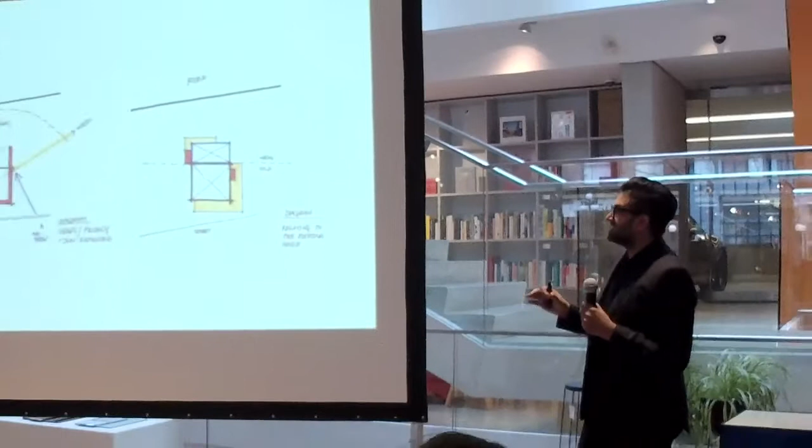So the idea with this project was to really just take the information, and really it was going to be a diagram of how the architecture worked - nothing more, nothing less. And so it started with these diagrams.

It was about looking out back to the backyard towards the river, an untapped view that hadn't been used. It was about taking advantage of the solar exposure, sun in the house that wasn't there before. And then most importantly, it was about modesty - using a modest material palette, but also thinking about it almost like horse blinders, so the front of the house maintained its real traditional quality, but on the back there was a lot more glass and certainly a modern aesthetic. And so it really started like that.

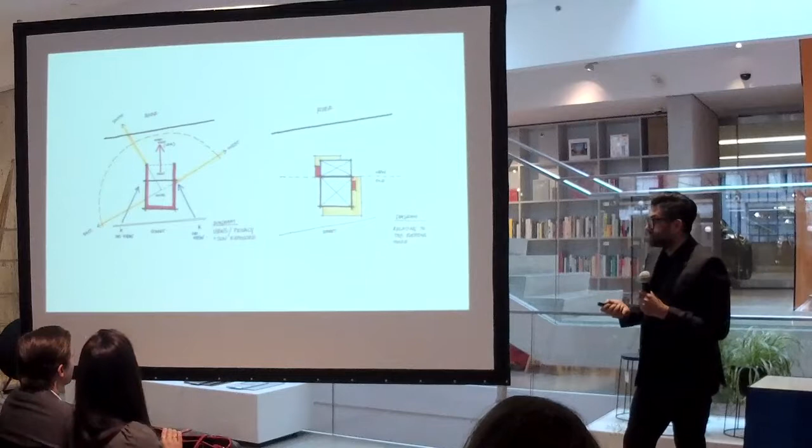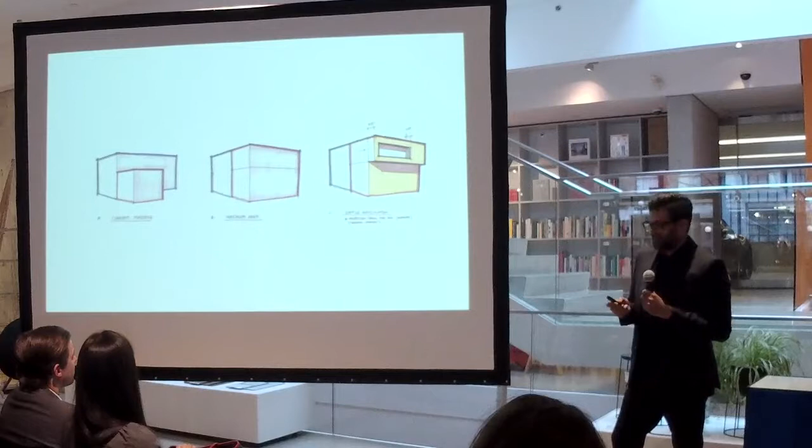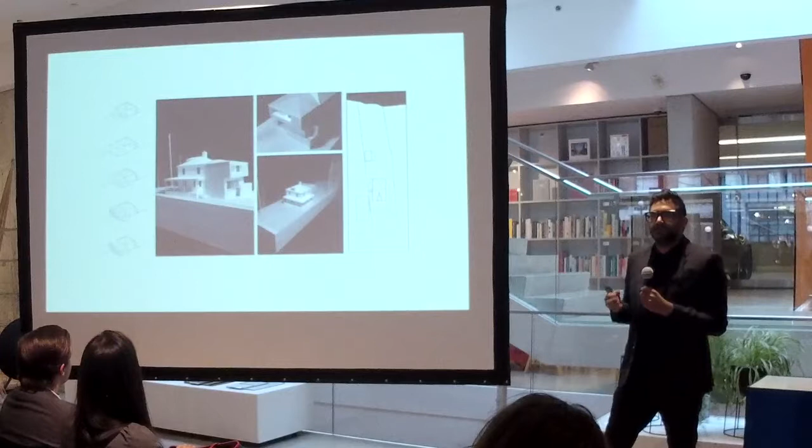And so that was also the beginning of this ethic of design, thinking about things in 3D, not just in diagrams and sketches, going straight to three-dimensional computer models. Even when it was just me and not an us in the studio, it was about making these models, playing with little pieces of wood, being able to walk around it and see what it's going to feel like and how it's going to work when playing with solar diagrams.

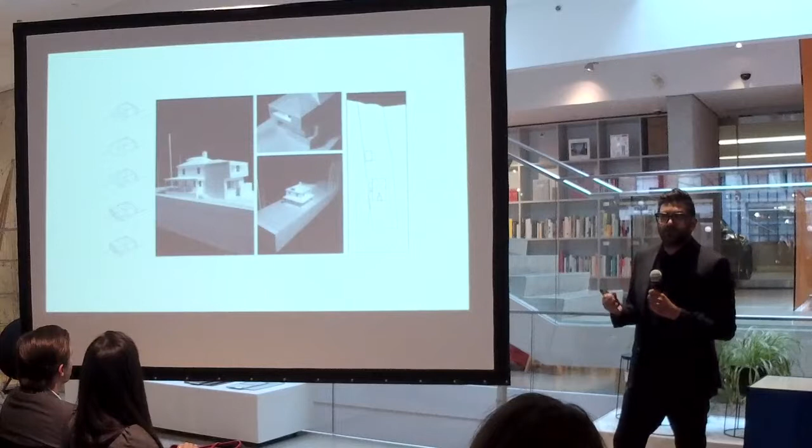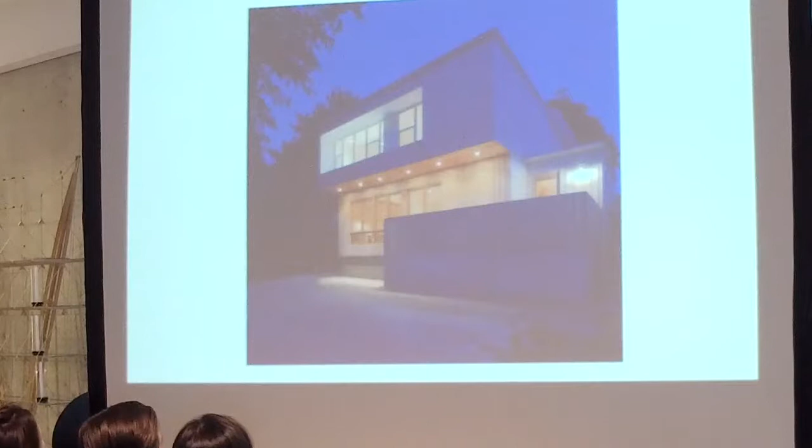And so this is almost this kind of chameleon type building, where the front very much maintains its very local and familiar palette of eastern white cedar shingles. And then on the back, hence the name cedar and three textures, playing with vertical stripes of the same cladding. On the back, it's really this modern kind of intervention that looks out towards the water.

Now, probably the most important part about this project, beyond it being the first one, was the builder. We interviewed three people for this project, and the first two were very well-known guys in town who had built forever and were very comfortable with modern as well. But the third came in and absolutely knocked our socks off - it was a no-brainer. This person would end up becoming really a mentor to me, and happens to be a woman builder, Deborah Herman-Spartanelli, who was one of the first mentors I had with my own practice.

Now, when I'm talking about my work, it's hard for me to not talk about the first three because they really go together as a set. Not just because I was in the attic at that point by myself figuring out what I was doing, but also it was really trying to figure out what that process of design was going to be as I moved forward.

What's interesting about this project was it really only came about because of that wonderful person, Deborah, who met with some clients not far along, maybe about 15, 20 minutes down the coast, who came to her and said, we have this cottage and we want to think about renovating it. Do you know anyone who's a designer around who could help with this? And she said, well, I'm working with this young guy. I was young then.

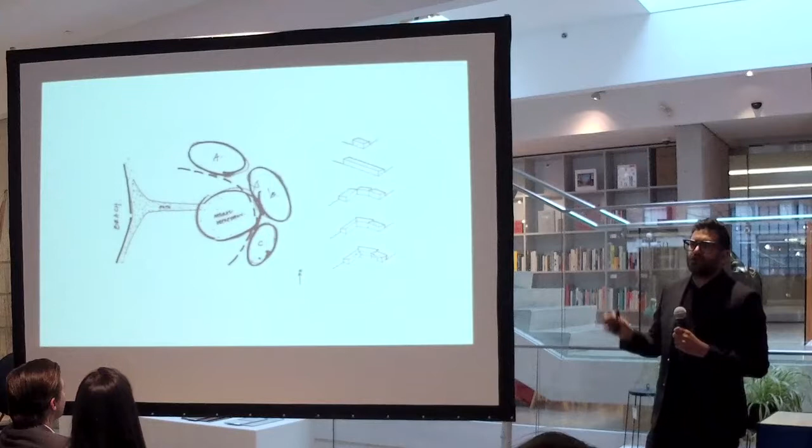I said, well, what if, like mother's arms, or grandmother's arms in this case, wrapped around this bowl? So no matter where you are in the building, you're actually just looking inward to where everyone is playing and congregating. From that idea came the idea of a program wrapping around this bowl: a guest wing, the main gathering area with the kitchen and living room, and then the ensuite area with their own quarters, with the ability to shut it down depending on who was around.

That translated really quickly into playing with materials. These ideas are flat, and you're playing with diagrams at that point. You feel almost this itch to get some card. Maybe it's the generation—I went to school where we were still making physical models. It's like we need to see what this looks like and test it out.

So just with card, starting to play with the idea of that very traditional shed building that you see all over the coastline of Nova Scotia and parts of our country. It's like, well, what if it was this contorted form that really wrapped around?

Those models end up becoming a lot more complex and starting to think about structure. Starting to think about how that thing actually plays out in scale, and becoming more detailed, thinking about light from above and how you control solar gain.

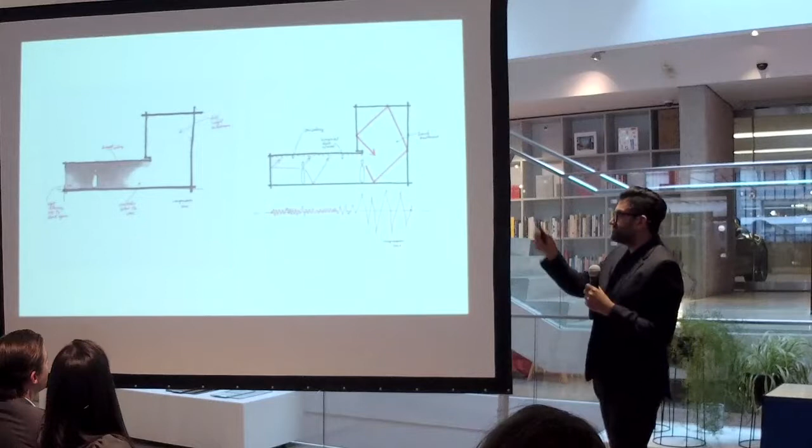Playing with ideas like this that probably felt very lofty at the time, but ideas like Frank Lloyd Wright would have done about compression and pushing the space down at the entry, so that when you walk around that corner, not just with the light but with the way we handle the sound, it just felt like you opened up towards this unbelievable view that is entirely what Nova Scotia is known for. Every time you re-entered that space, it felt just as special.

Even 9, 10 years later, there is nothing more exciting and kind of crazy than the thought of making really horrible card models and then starting to actually build it. It's sort of a thing that's hard to believe.

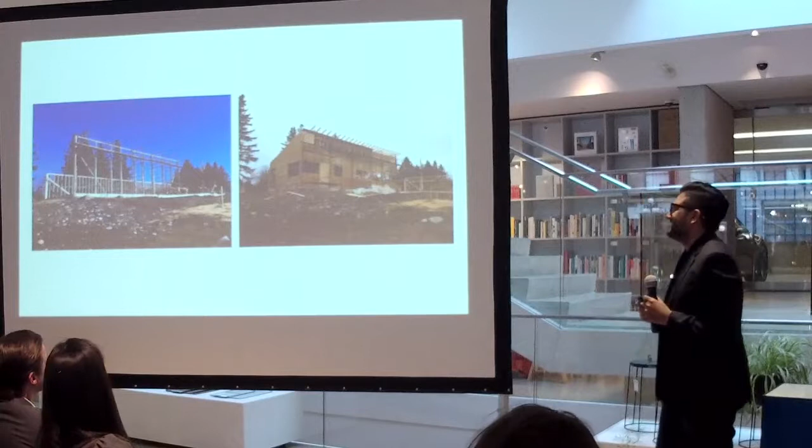There's a photo that I can't find, but I remember when I worked at Young and Wright on one of those McMansion-y kind of cottages, there's a photo of me standing in a foundation. The smile on my face—part smile, part terrified in case I messed it up—but I drew that foundation and someone actually built it, which seems insane, right? That sort of thrill of seeing those big ideas come together.

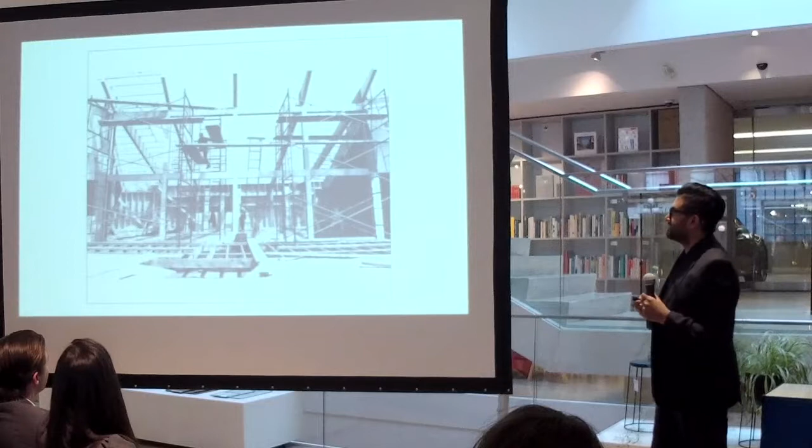Ideas of light and contrast and feeling alone, but also feeling together with everyone. Ideas of texture and materiality. And then finally seeing it all come together. Even if you're there every week and only a little is done at a time, there's nothing more awe-inspiring than seeing that come together.

So this is on the entry side, where as you approach it after your long drive—your hour-and-a-half drive from Halifax to the cottage, which is primarily tree-lined—you don't actually get a lot of view of the ocean in that last half hour. The idea there is the scale of this side of the building is really low, and as you enter and turn that corner and see that view, you're not just seeing it for the first time on your property, it's actually the first time you've seen it in your whole journey there.

People always ask about this solution with the stone lining in the fireplace. That's there for code, but now when you go back, that cedar has grayed out and it's really become a completely monolithic palette.

This project ended up getting us some really nice attention—not just the project, but my collaboration with Deborah and the engineer we worked with, Andrea Doncaster, who I use all the time. You can imagine a trio like that being slightly unorthodox in a fairly masculine field. That project had an article that came out in the Globe and Mail.

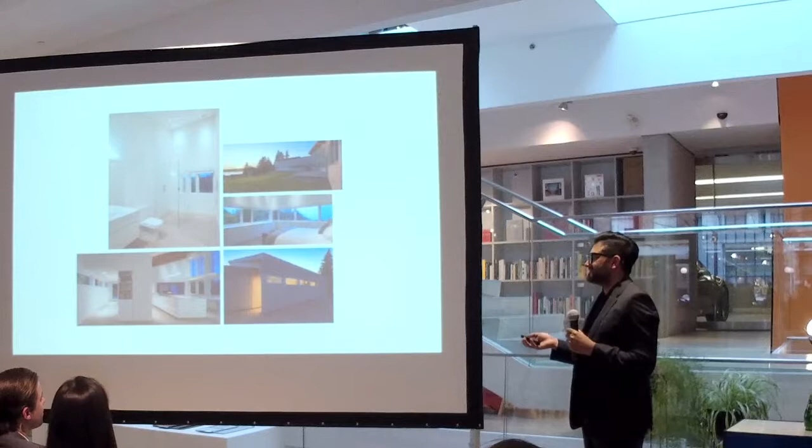After reading that article, it ended up being too far for Deborah to build, so I took it on. This was a couple nearing retirement who had previously been living in a basement apartment in Halifax. They were artists before they had children, ended up getting standard jobs to pay the bills, and really lost track of their passion for the arts. So they bought this property in the forest, about 45 minutes from Halifax. This was going to be it - they were going to be alone in this wooded landscape where they could finally make the things they'd wished they'd been making for the last 20 years.

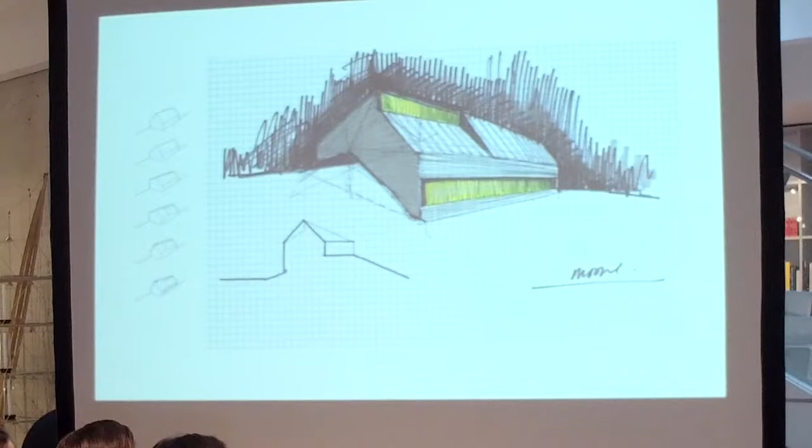That ended up becoming this sketch, which was really about this thing climbing up the hill with long, uninterrupted views of the woods. There's one thing about wanting to feel alone in the woods in this scenario - you feel really alone when you can see all of the nothingness around you.

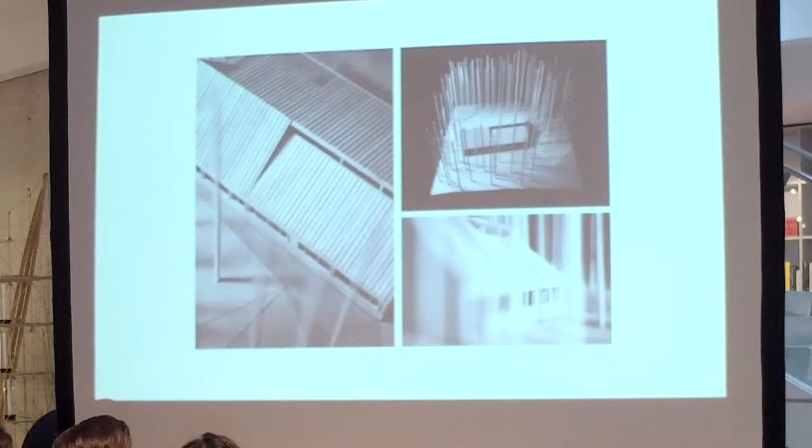It's different than just being enclosed somewhere, but to actually see the nothingness. So again, playing with those models, starting to think about materiality and those gentle moves that allow for light and the specific program they were going to use.

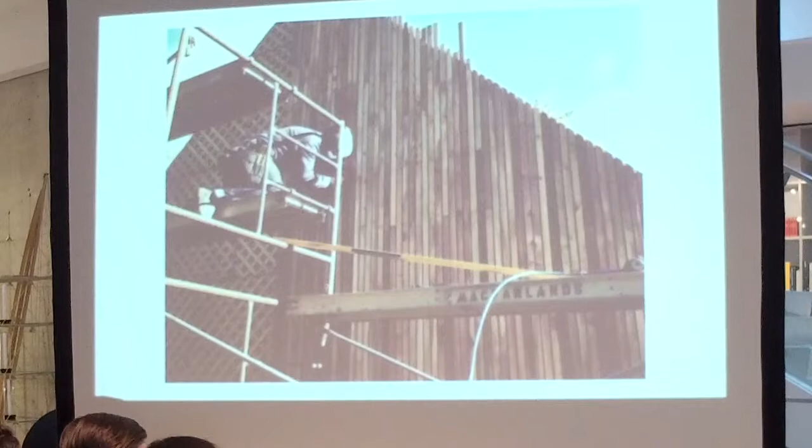This project was really a labor of love, not just for me, but for a lot of people. Like I said, they had previously been living in a basement apartment. There wasn't a big budget, but there was really a will to do something special. As we were interviewing builders for this project, this young guy comes up to me - he had just started his construction company, had tattoos all over his body, and was like, 'Look, I want to build your project.'

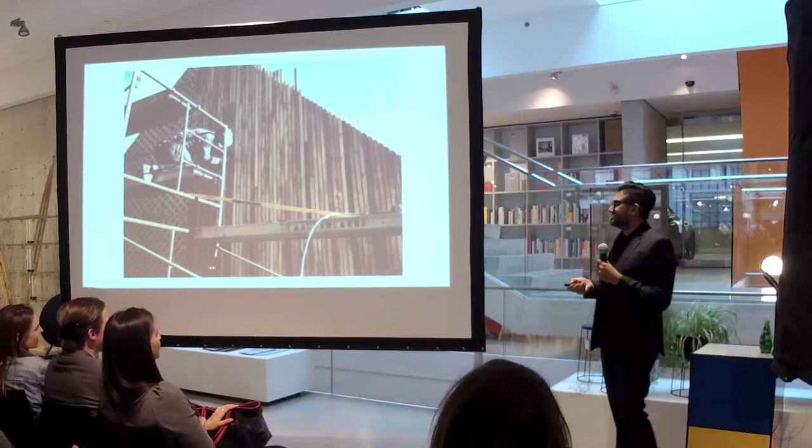I was like, 'That's very aggressive, to just come to someone's house and say that.' But we ended up going with it, and I was intimidated. It was really about this sweat, people just working to prove themselves, just as I was doing in that stage of my career as well. So ideas of isolation and being alone, but also being together where it's needed, not being afraid to be high contrast or dramatic.

You can achieve a lot just by really thinking about it and looking around you. This steel gate, the screen, was just in the steel trash bin at the place I think it's called Metals R Us, believe it or not. It was at the back, under a pile, and we were like, 'what can we have that for? That's going to be the screen.'

These hanging lights are probably not the kind you'd see in this store - they were literally a hanging bulb from Canadian Tire that we jimmied together to make this. Then these louvers made of hemlock just cantilevering out - really just playing with texture and the material of very, very basic materials.

And in the end, it looks exactly like the model. So there really isn't that point where the sketch and the model start to lose those ideas - it's about carrying it right till you complete it.

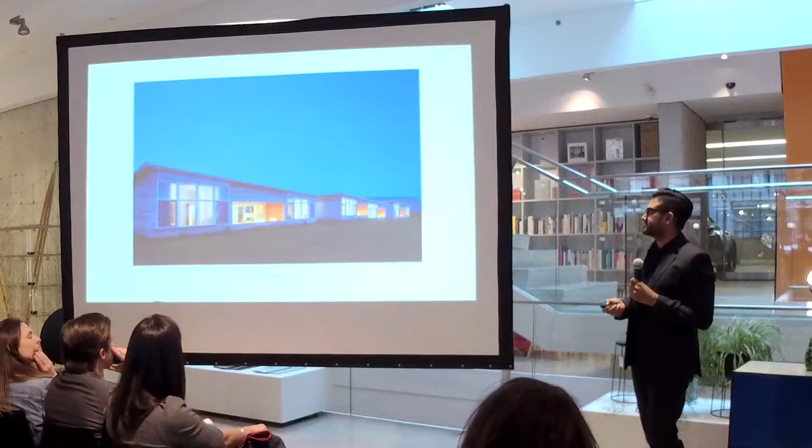We started taking that strategy, that formula we'd produced, and playing with very familiar forms and very familiar materials, trying to do something special with it in a quiet way. Then in 2014, I was able to move just down the hall into a slightly bigger space, with a few projects under our belt, and was able to hire a couple more people. We continue, and we start experimenting with different things at this point.

So we're playing with retail. We're starting to play with different kinds of residential.

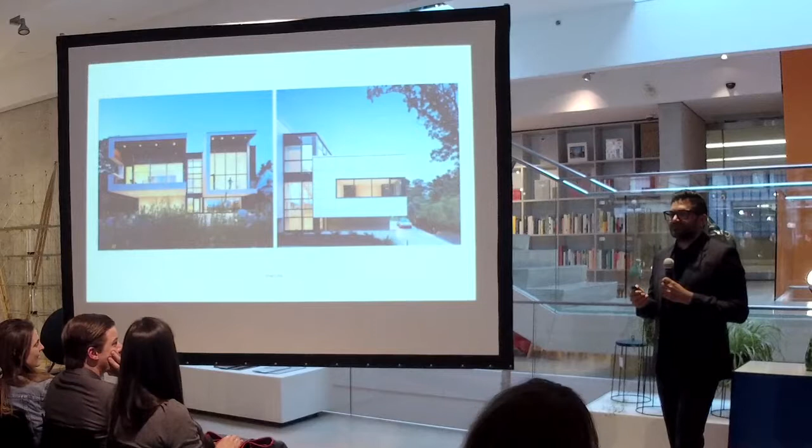I should stop and say that the reason I'm here today is because of Ema Peter, who is your local superstar. She's, as you know, one of the best photographers in the world, if not the best. We've had the opportunity to bring her out for three or four projects now, and it's made all the difference in our studio to work with the best people.

Then in 2016, I just felt like it was time. It was a different thing — now I was going back to Toronto, having left as a student, someone like 7th on the list of a huge project working on ceilings, and then coming back having already built a little portfolio for myself. We now have 5 people working there, and a different kind of work that we work on.

I'm going to flip through a couple of projects here, but I'd like to talk a little bit more in depth about a few.

And these were all shot by Ema. So I'll go into this one, and there's a few I'll talk about. Sluice Point, which really is on the southern tip almost of Nova Scotia. It's unique in that it's an Acadian area, and like a lot of the places where the Acadians were banished to, they certainly weren't good for farming, and really just weren't ideal plots of land at all. They were like, you go there. But they made do.

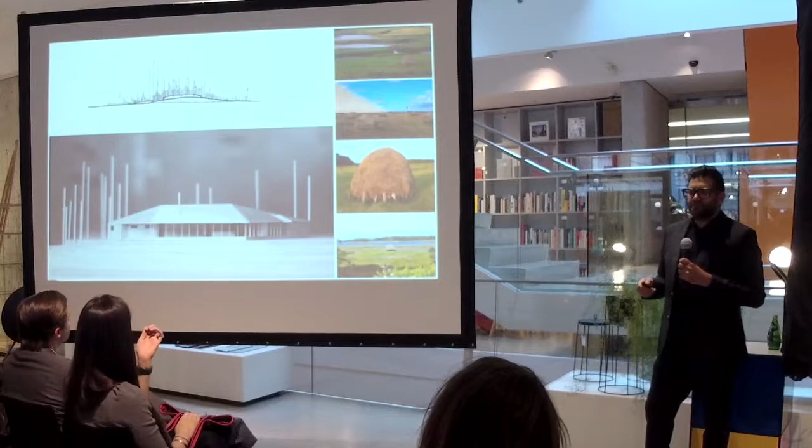The idea here was for a Swiss client who came to us, but didn't just bring us the project outright. We ended up competing for it - they gave us a stipend and gave another firm a stipend. It was just Jeff and I at the time, and we went absolutely bananas trying to win this first competition ever.

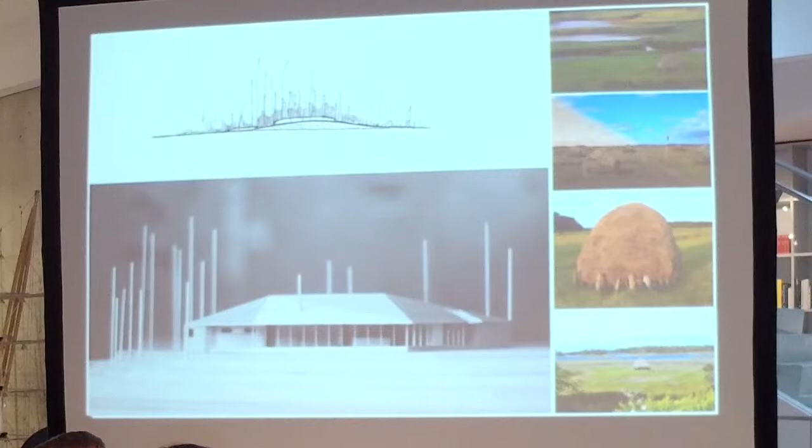We ended up winning the project, and it was really about this idea of a growth in the landscape - this low, long form that, if you squint your eyes, doesn't take away from this untouched rural area. It actually just makes it special.

So again, these card models, starting to play with diagrams of how you can take these regional forms and start to bend and pleat them to fit around this peninsula that shoots out. This was the first project here, which is this one.

This plan aims to almost condense your view - this tall, skinny view that, once you go inside, flips the orientation entirely. It becomes low and long and infinite.

This is the peninsula, and this is that first building here. There's a long drive before you actually get to it, and your view ends up being blocked. This idea of withholding is something we repeat a lot in our work to build this anticipated drama.

This was actually a drawing done by a student who worked with us. I knew he was an incredible artist, and I said, 'Carl, I don't know how long it's going to take you, but I think you have the opportunity here to do something absolutely special.' He basically sat for a month with cotton balls and graphite dust drawing these clouds. He's actually won numerous awards for this drawing.

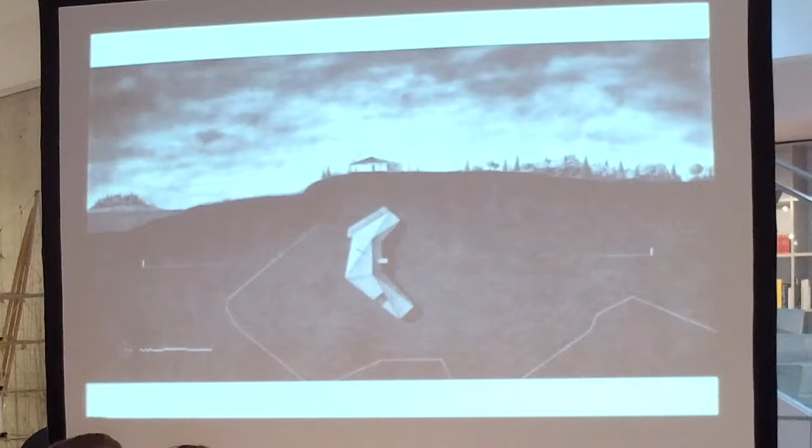It's those sort of things we try to do in our studio - things that don't make you money when you're trying to grow a business, but that's the joy of it. I always tell people, what's the difference between when you're in school and when you're running a practice? Ideally, there should be no difference. You should be working at it exactly the same way.

That roof form is actually really complex, but the budget wasn't very big - this is Nova Scotia, there are no big budgets. Even when a Swiss client is coming, the reason he's coming here is because you can build something with a very little budget.

So what we did was take that extremely complex roof form and build it entirely with prefab trusses. Every single truss itself is completely unique.

The reason we made this model - Andre is here, who worked with me, he built this - the reason we built it ourselves and put it together is you just can't trust people, and you can't necessarily trust the truss manufacturer that there isn't going to be some weird thing sticking up. So you put it together to make sure those lines down the hip actually work the way they're supposed to. We're psycho. Seeing this come together in that same form is the fun of our job, really.

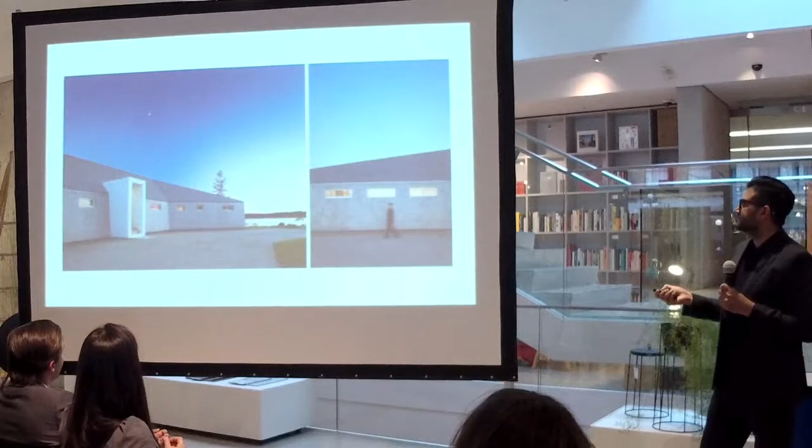And this thing really feels, again, when you squint your eyes, as if it's part of the landscape, the landform itself, but then at night it becomes this creature in the wild.

So I first went to this property back in 2012, 2013. McIsaac was the owner, and his family had basically owned it for, I think he said, around 300 years. As they first came over to the New World, their family ended up settling on this piece of land in Cape Breton, and so knew it very well. What made this property really special was that it wasn't actually good for farming, it wasn't good to raise animals. It was actually just a place for kids to play. He remembered as kids, that's where their grandfather would take them to learn how to snare rabbits.

This was a project for a New Jersey attorney who had basically owned this property for a couple of years, from Lawrence McIsaac, and decided he wanted to build these little pavilions. As you're trekking through this landscape that has a river and a little waterfall, and then you come to the edge and there's a massive cliff, not unlike the one I showed you. It's about storytelling, telling this narrative. So the first project was over here, the cabin.

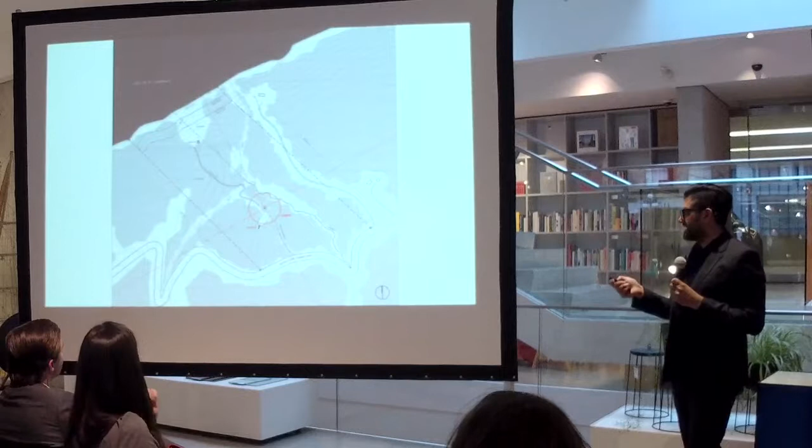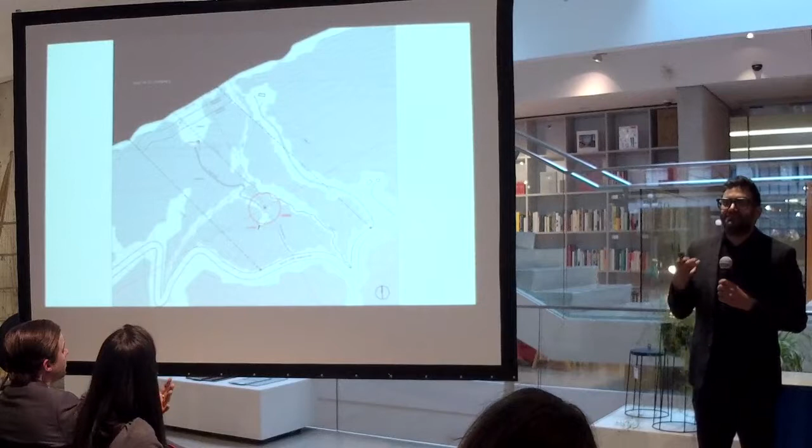The idea wasn't to actually have that coastal view on the edge, it was to look out towards where that building and that landscape would be. So you're looking through that valley out to the conclusion of the story. Thinking about height, thinking about regional form, taking that really steep gable this time and playing with it so that from every part of this cabin you have a different view of something special, whether you're looking out at the forest, back at the waterfall, or down that valley itself. As you're winding your way up, you're seeing something else that's different.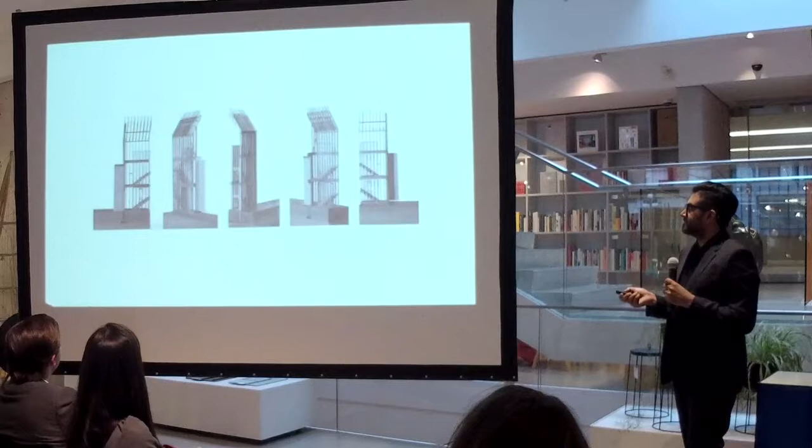Now, this is a really windy area, a place famous for wind. So one of the things here, with a low budget and using Andrea Doncaster as our engineer, was really thinking about bracing. How do you use just nominal lumber and hold-down clips to ensure that this thing stays in place? That ended up becoming a really interesting thing to model, to really test out how those ideas work.

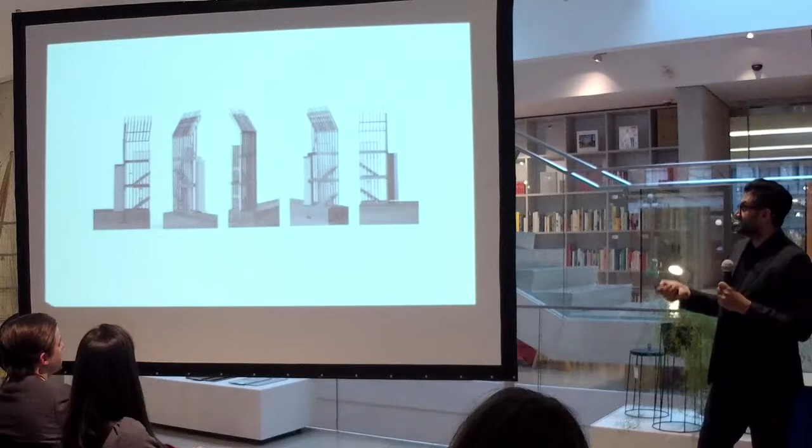So we took that idea, and I said to the client, what would be really cool—brace yourself for this—is if we did this with a 2-ton Corten steel hoop that was 24 feet high. And he was like, yes, let's do it. That really ended up becoming the icon of the project, this entry hoop that speaks to this tradition of the windbreak in this extreme climate.

Clad entirely in local cedar, with these strip windows up the back just to give you a little hint of life inside, almost as you're climbing the stairs.

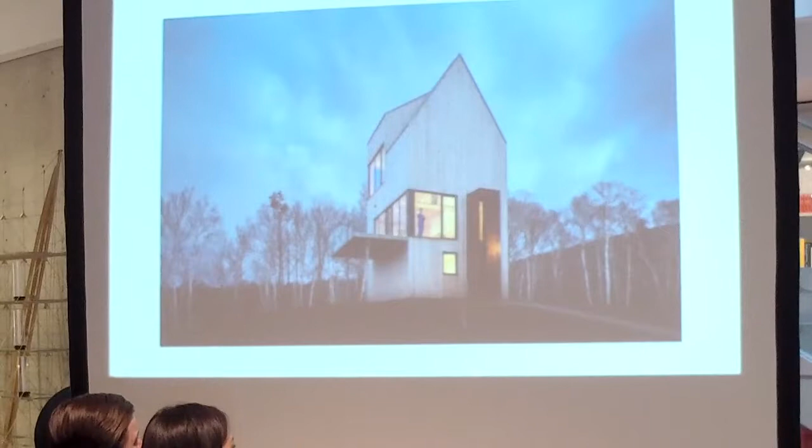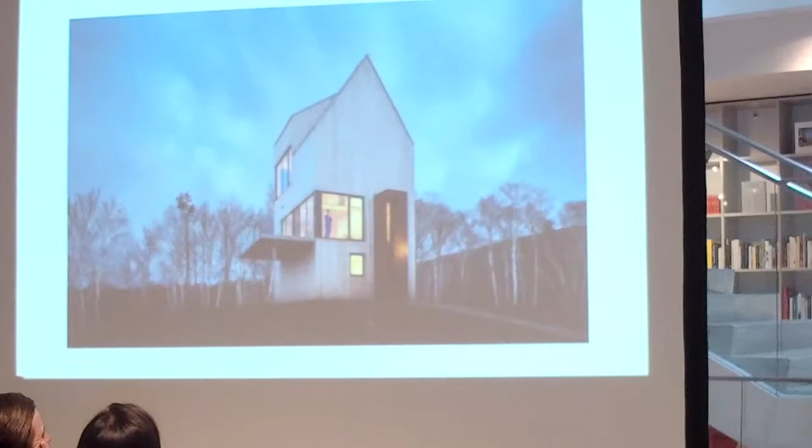I'll go back just for a sec. So this wonderful guy here, Andre Cott, used to work for me—he's way over there, hiding at the back. I remember asking him to model in this shoot, and I was like, I just need you to stand there, there's going to be a few different views, but you're going to be there. I remember him thinking, this is really cool, right, this is really great. But what I didn't tell him was that the reason we picked him is because he's not very tall. I picked him out of the studio, and I was like, this is going to make Rabbit Snare Gorge seem really tall. See, look how cool he is there, right? He doesn't know that—I would never have told him that beforehand.

So that was the first of a few projects on that site, again this idea of these creatures in the wild. I ended up teaching at Yale last semester and had the privilege of bringing my students to Cape Breton, where we took this property, and the project for the term was to design these creatures in the wild. It stemmed from looking at regional forms and materials, but starting to play with these interesting small buildings.

This was the second building that got built. It's actually for kayak storage and a wood shop, using steel frames and entirely cladding it out of wood. This happened around the time my son was 2 or 3 years old and really getting into transformers, so part of me was doing this to impress him. We made this building essentially like a transformer, with 4 doors on the sides that all fold up, and a huge gate out the front that peels down where you can drive an ATV out of it and slide your canoes out as well.

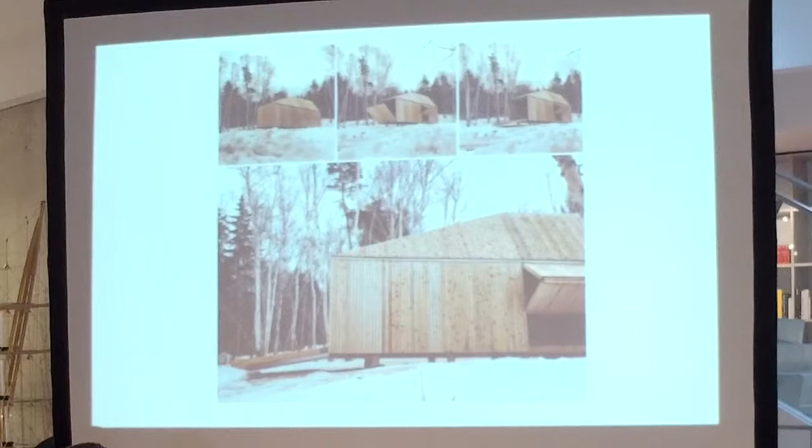The Lookout, not far from there. A lot of the projects we did are in the Inverness area and Cape Breton. This one was for Toronto clients who bought this really narrow piece of land. Even when they bought it, the locals thought these people are crazy, you can't build a house on it, it's so narrow and there's a huge cliff. It was really just thought of as the lookout, where people would stop over and take in the view looking back at the coastline.

So we went to them and said I think we could do something just by this back wall, really creating a linear bar building that looked out towards the water. But in this area, like the last project, the climate is very extreme. You have wind not just rolling in from the ocean, but actually from the hillside behind it. So really it was about coming up with a form.

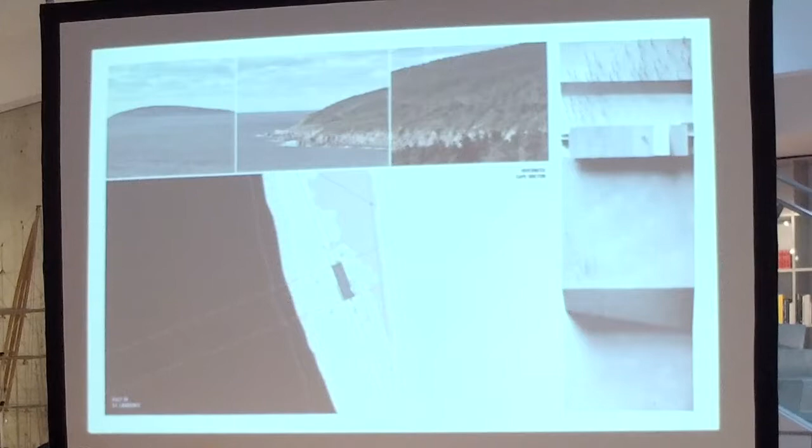So this is the coastline here, and this is the property with this very long building and a long shed roof that's manipulated in a very gentle way to allow for more light in the main gathering space. This idea of playing with these pods that slide in, and this back wall that has all the cabinetry and millwork in it, backed up against the bank behind it.

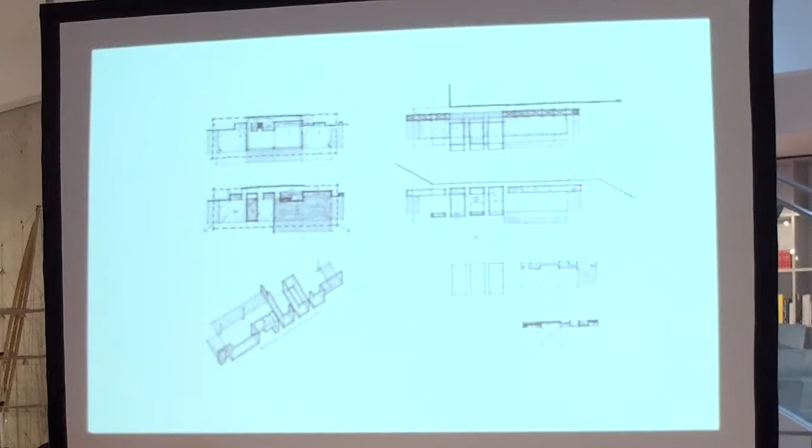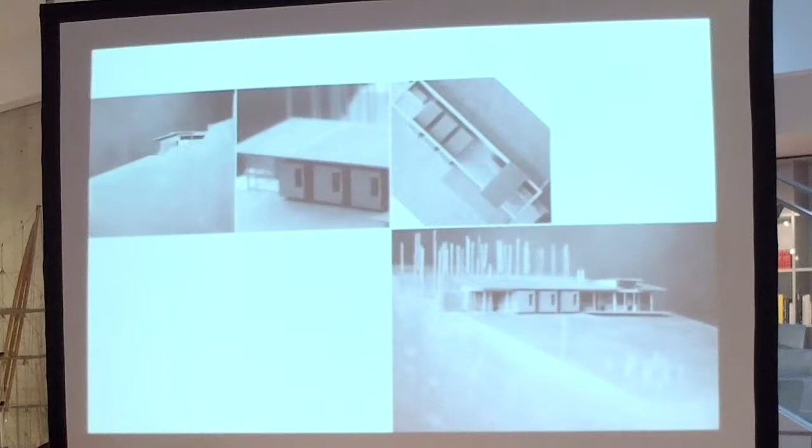And a roof form that really feels aggressive. Instead of the standard of the roof going up, looking out towards the view, this is almost bracing itself. It has its hood or its hat down low, so you can almost not see someone's eyes. It's cutting into the wind itself, very aggressive, with just one little eyebrow sticking up.

Andre wasn't around for this one.

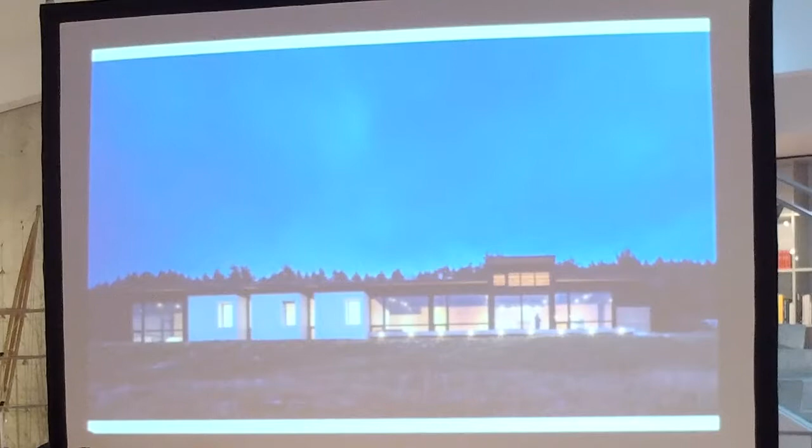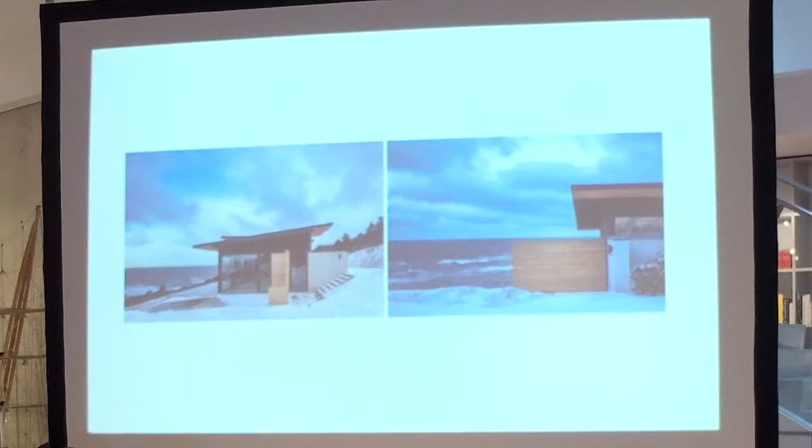You can see it's not gentle water, the wind is very intense. So the idea here was that it's really back braced, hunkered down and lying really low, trying to be aerodynamic.

And a final project I'll talk about, Float. This is actually just slightly outside of Halifax, and probably one of the reasons I love the city I live in is that only 10 minutes away from downtown, you're essentially in the wild, with untouched pieces of land available. That's why a lot of our clients, whether from Switzerland, the States, or other parts of Canada, come to us, because you really can't buy land that beautiful for that kind of price.

Not far out from the city, this is called the Purcell's Cove Backlands, a real glacial valley that has left these odd outcroppings, huge granite boulders strewn across the landscape, making the land useful for hiking and mountain biking. This wonderful client of ours bought this piece of land, and behind it was a huge boulder. The idea for us was to look out towards this view, but use that boulder to the best of our abilities, to really back up into it, so it almost feels like the building itself is part of that landscape.

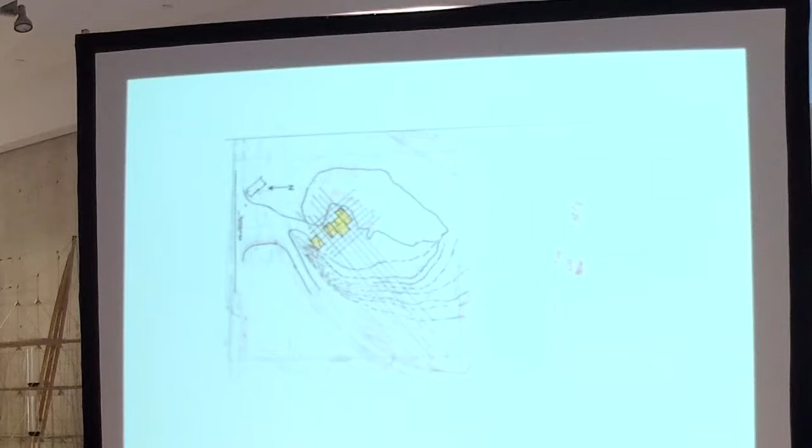So again, taking those regional forms, taking that standard shape, the shed building, and starting to play with it in three dimensions this time, not just opening it up, but actually tapering it out on the sides.

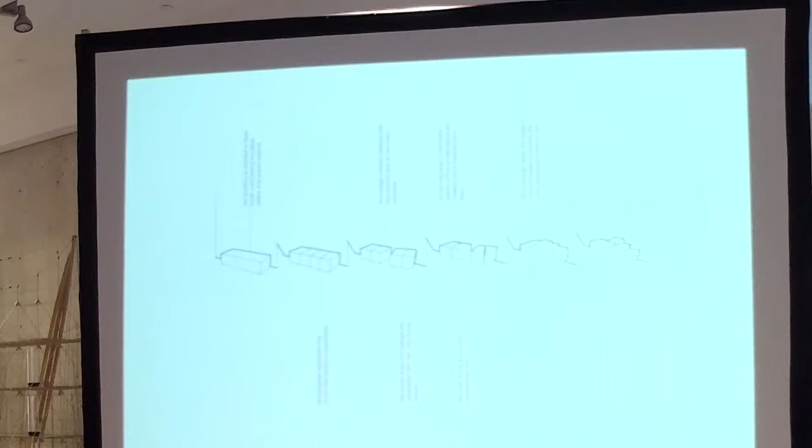The idea with this project, float, is a term used to describe outcroppings which have actually fallen from its place. So it's geological float, and this is essentially meant to mimic the idea of rock that's broken free.

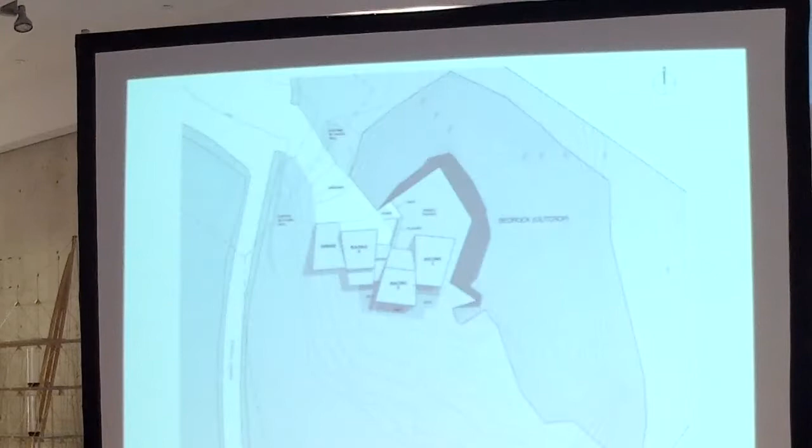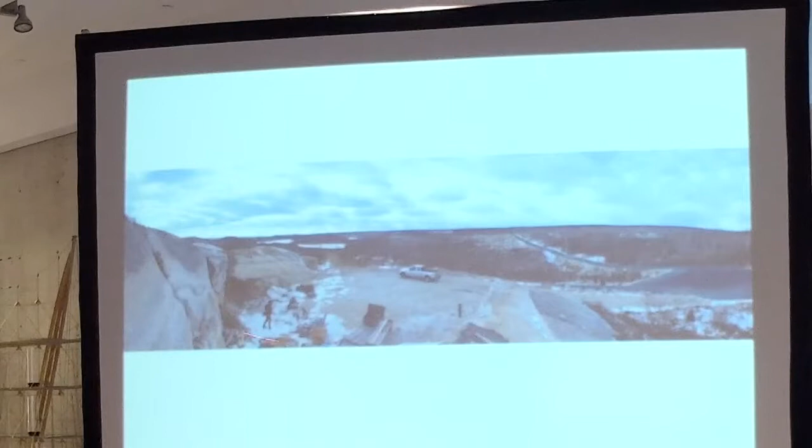And the landscape itself, we tried to use the natural landscape, so even as you're walking through the house, the topography remained unchanged, so you're sort of climbing up and winding your way up through that ground level. This was the site, looking at a series of lakes, and then you have the wide open ocean over here, and this is the massive boulder that it backed up onto.

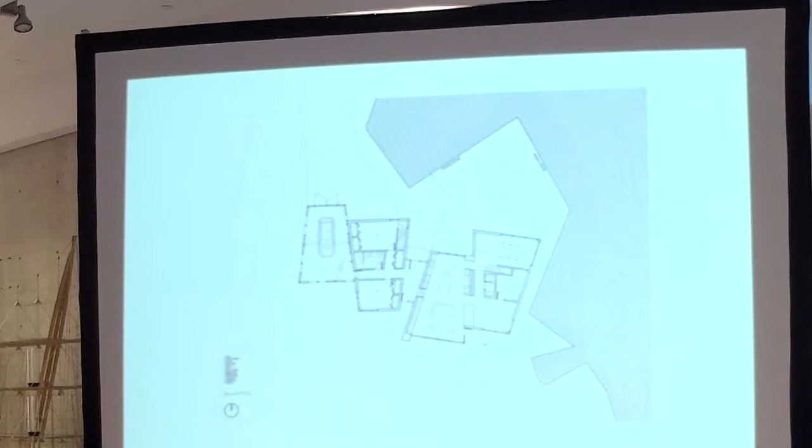So upon entering, you actually enter through one of the gaps. You sort of filter in through it, and then you start winding through the program. And as I was saying, in section, you're also stepping.

And again, that idea, that just awe-inspiring act of actually seeing your completely ridiculous ideas being built is something that I hope never gets old.

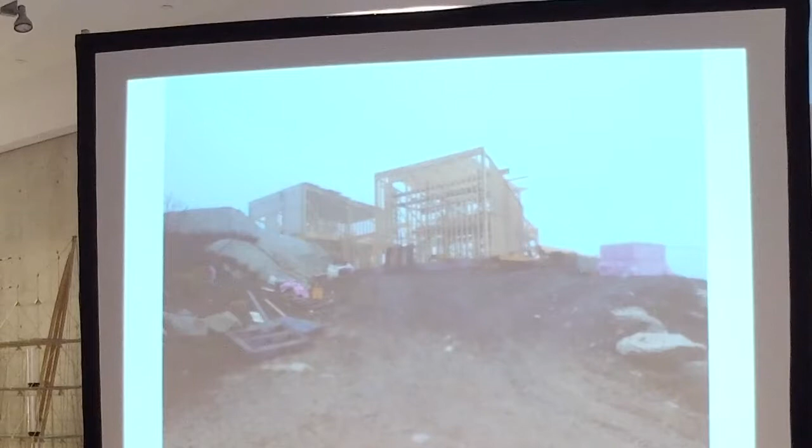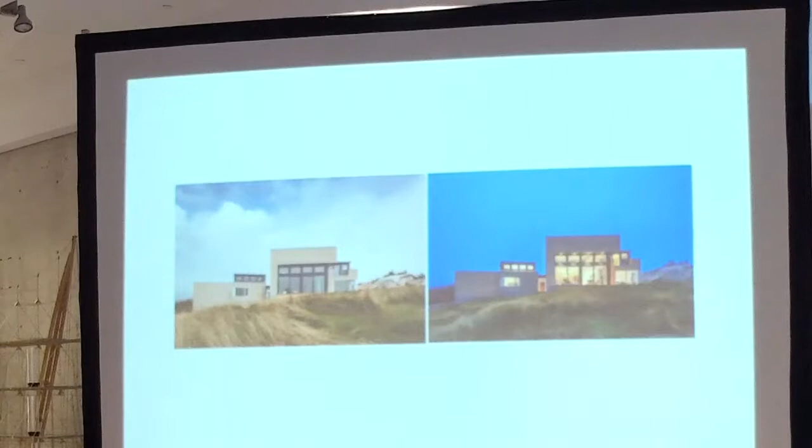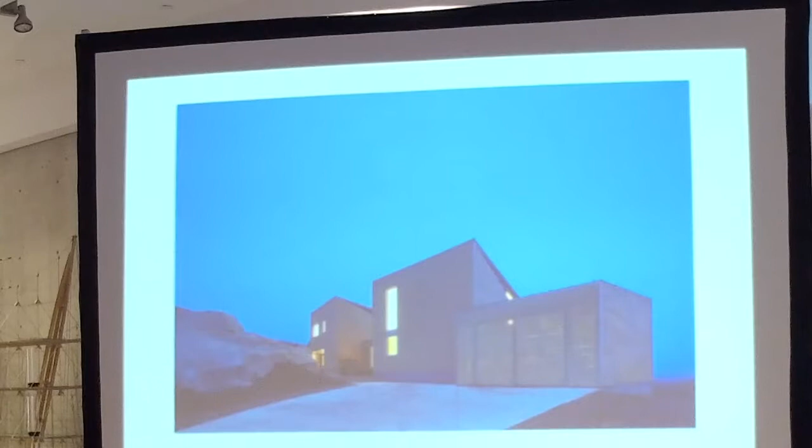The garage itself was actually, although formally the same as these other buildings, we made it with open gap slats just so that it became a lantern at night, and really kind of broke up the form even more.

But fortunately, he's now engaged, so it all worked out, and I feel like that's the bonus. Like, no bonus coming for the next little while.